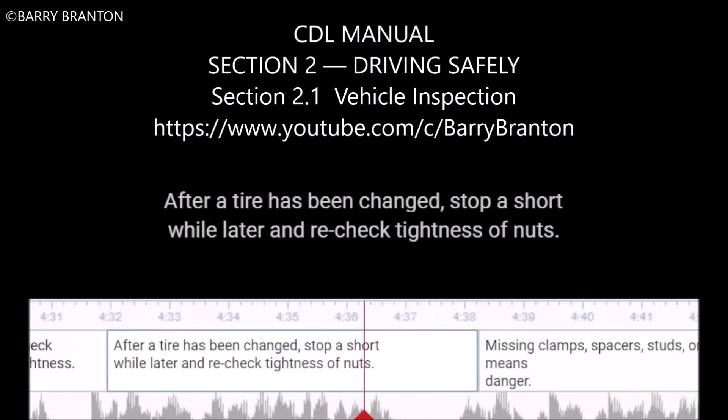Missing clamps, spacers, studs, or lugs means danger. Mismatched, bent, or cracked lock rings are dangerous. Wheels or rims that have had welding repairs are not safe. Bad brake drums or shoes. Cracked drums. Shoes or pads with oil, grease, or brake fluid on them. Shoes worn dangerously thin, missing, or broken.

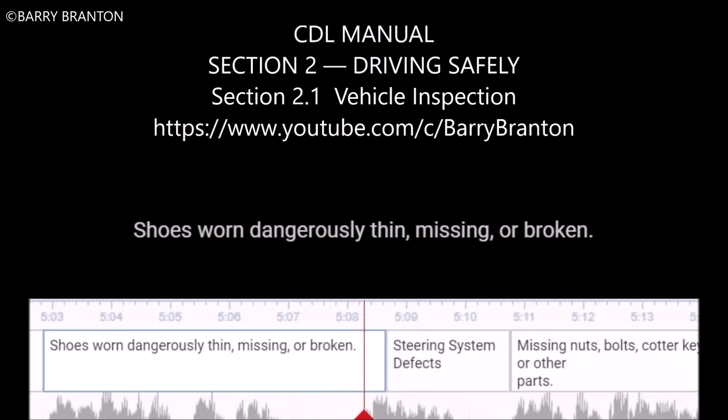Steering system defects. Missing nuts, bolts, cotter keys, or other parts. Bent, loose, or broken parts such as steering column, steering gearbox, or tie rods. If power steering equipped, check hoses, pumps, and fluid level. Check for leaks. Steering wheel play of more than 10 degrees, approximately 2 inches movement at the rim of a 20-inch steering wheel, can make it hard to steer.

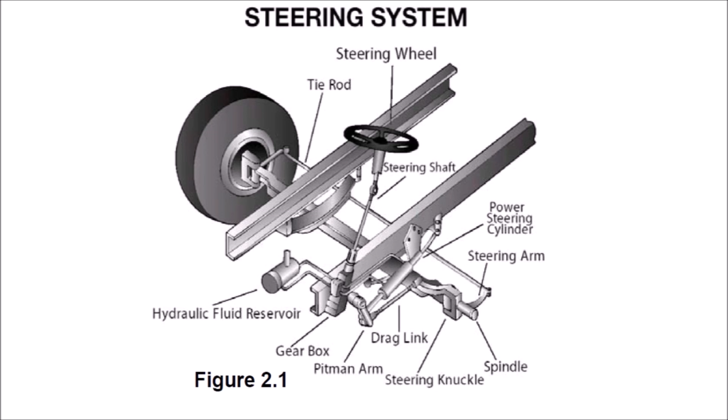Figure 2.1 illustrates a typical steering system. Picture on page 2-2, Figure 2.1, Steering System. Highlighted items: steering wheel, tie rod, steering shaft, power steering cylinder, steering arm, hydraulic fluid reservoir, gearbox, pitman arm, drag link, steering knuckle, spindle. Continuing with the text.

Suspension system defects. The suspension system holds up the vehicle and its load. It keeps the axles in place. Therefore, broken suspension parts can be extremely dangerous. Look for spring hangers that allow movement of axle from proper position. See Figure 2.2. Cracked or broken spring hangers. Missing or broken leaves in any leaf spring. If 1/4 or more are missing, it will put the vehicle out of service, but any defect could be dangerous.

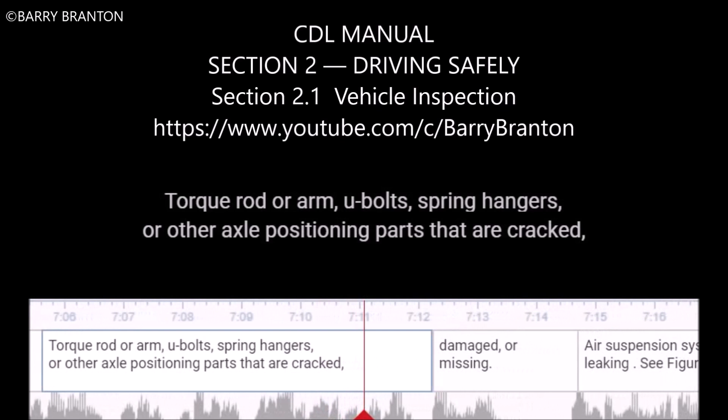See Figure 2.3. Figure 2.3 appears on page 2-3. Continuing with the text. Broken leaves in a multi-leaf spring or leaves that have shifted so they might hit a tire or other part. Leaking shock absorbers. Torque rod or arm, U-bolts, spring hangers, or other axle positioning parts that are cracked, damaged, or missing. Air suspension systems that are damaged and/or leaking. See Figure 2.4. Figure 2.4 appears on page 2-3. Continuing with the text. Loose, cracked, or missing frame members.

Picture on page 2-2, Figure 2.2, Key suspension parts. Highlighted items: hydraulic shock absorber, vehicle frame, front axle hanger, leaf spring, frame, bearing plates, torque rod, axle, main spring, auxiliary spring, spring shackle. Continuing with the text.

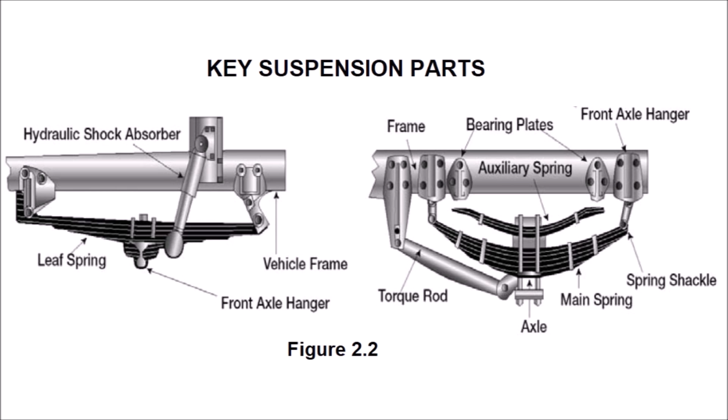Picture on page 2-3, Figure 2.3, Safety defect, broken leaf in spring. Highlighted items: broken leaf, main spring, axle.

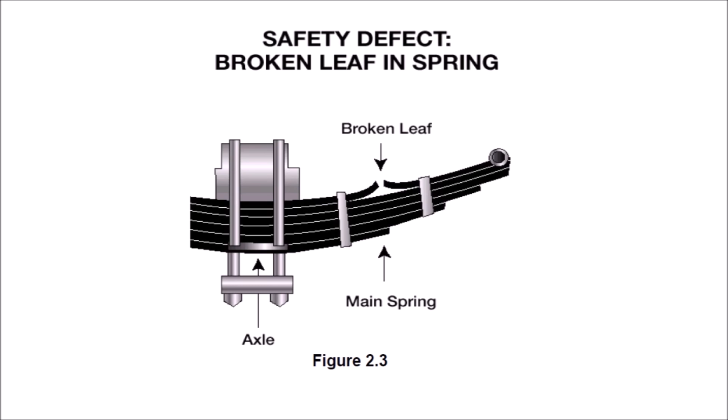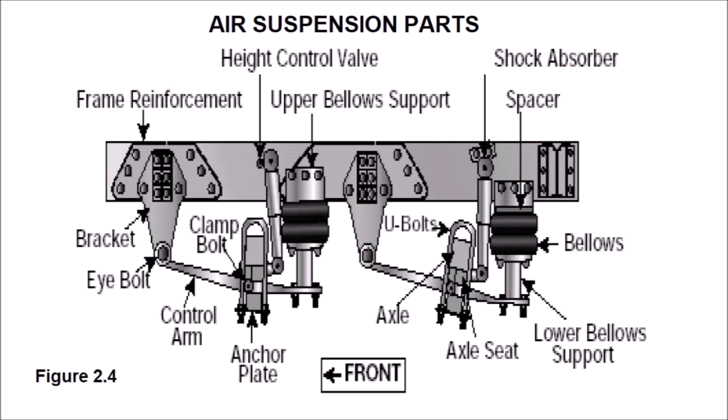Picture on page 2-3, Figure 2.4, Air suspension parts. Highlighted items: height control valve, shock absorber, frame reinforcement, upper bellows support, spacer, bracket, clamp bolt, U-bolts, bellows, eye-bolt, control arm, anchor plate, axle, axle seat, lower bellows support. Arrow points to front. Continuing with the text.

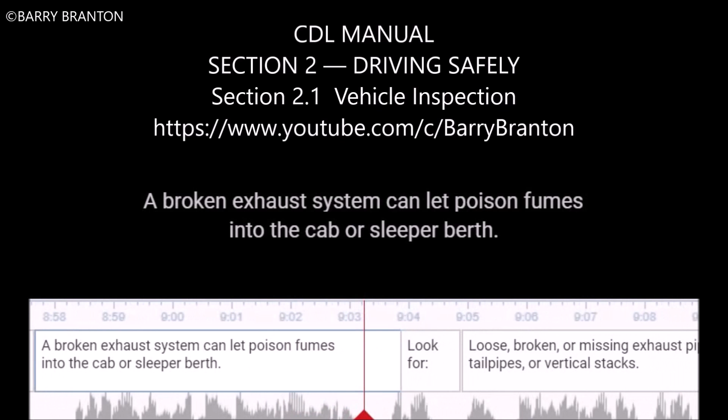Exhaust system defects. A broken exhaust system can let poison fumes into the cab or sleeper berth. Look for loose, broken, or missing exhaust pipes, mufflers, tailpipes, or vertical stacks. Loose, broken, or missing mounting brackets, clamps, bolts, or nuts. Exhaust system parts rubbing against fuel system parts, tires, or other moving parts of vehicle. Exhaust system parts that are leaking.

Emergency equipment. Vehicles must be equipped with emergency equipment. Look for fire extinguisher or extinguishers. Spare electrical fuses, unless equipped with circuit breakers. Warning devices for parked vehicles. For example, 3 reflective warning triangles. Cargo, trucks. You must make sure the truck is not overloaded and the cargo is balanced and secured before each trip. If the cargo contains hazardous materials, you must inspect for proper papers and placarding.

2.1.4 CDL Pre-Trip Vehicle Inspection Test. In order to obtain a CDL, you will be required to pass a pre-trip vehicle inspection test. You will be tested to see if you know whether your vehicle is safe to drive. You will be asked to do a pre-trip inspection of your vehicle and explain to the examiner what you would inspect and why. The following 7-step inspection method should be useful.

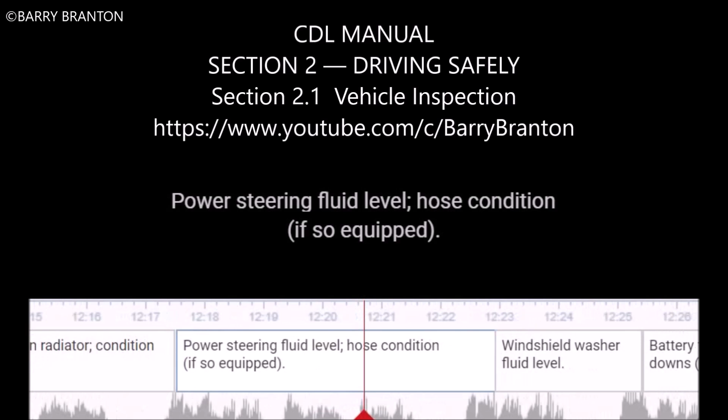Step 2. Check engine compartment. Check that the parking brakes are on and/or wheels chocked. You may have to raise the hood, tilt the cab, secure loose things so they don't fall and break something, or open the engine compartment door. Check the following: engine oil level, coolant level in radiator, condition of hoses, power steering fluid level, hose condition, if so equipped, windshield washer fluid level, battery fluid level, connections, and tie-downs. Battery may be located elsewhere.

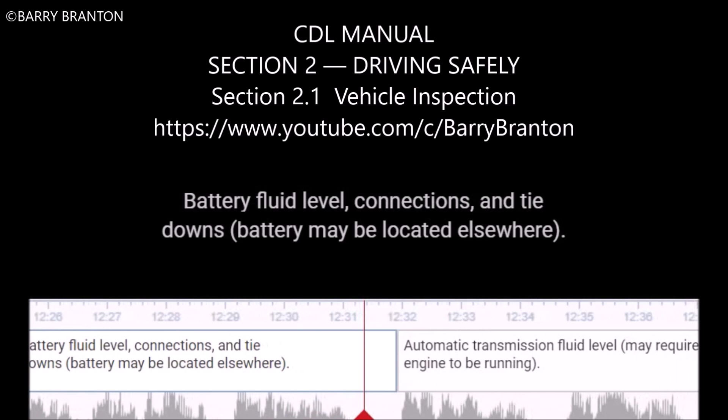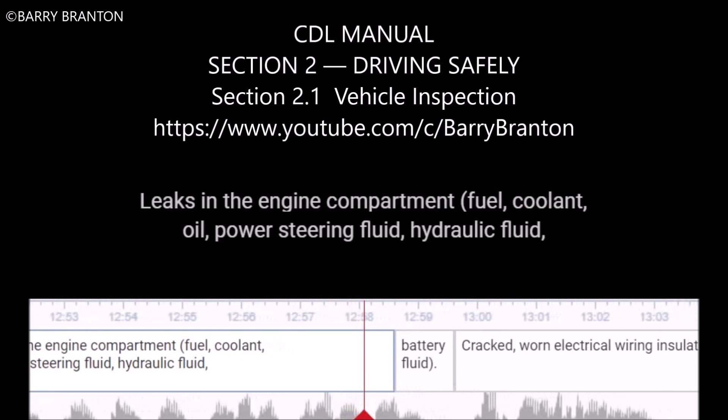Automatic transmission fluid level. May require engine to be running. Check belts for tightness and excessive wear. Alternator, water pump, air compressor. Learn how much give the belt should have when adjusted right and check each one. Leaks in the engine compartment. Fuel, coolant, oil, power steering fluid, hydraulic fluid, battery fluid. Cracked, worn electrical wiring insulation. Lower and secure hood, cab, or engine compartment door.

Step 3. Start engine and inspect inside the cab. Get in and start engine. Make sure parking brake is on. Put gear shift in neutral, or park if automatic. Start engine, listen for unusual noises. If equipped, check the anti-lock braking system, ABS, indicator lights. Light on dash should come on and then turn off. If it stays on, the ABS is not working properly. For trailers only, if the yellow light on the left rear of the trailer stays on, the ABS is not working properly. Look at the gauges.

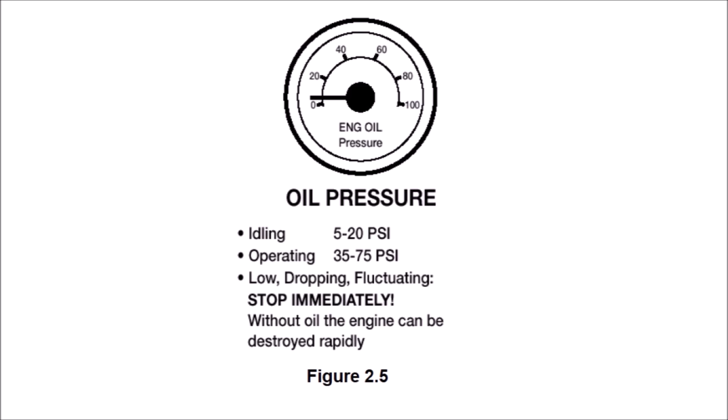Oil pressure should come up to normal within seconds after engine is started. See Figure 2.5. Picture on page 2-4, Figure 2.5, oil pressure. Idling, 5 through 20 psi. Operating, 35 through 75 psi. Low, dropping, fluctuating, stop immediately. Without oil, the engine can be destroyed rapidly. Continuing with the text.

Air pressure. Pressure should build from 50 to 90 psi within 3 minutes. Build air pressure to governor cutout, usually around 120 through 140 psi. Know your vehicle's requirements. Ammeter and/or voltmeter should be in normal range or ranges. Coolant temperature should begin gradual rise to normal operating range. Engine oil temperature should begin gradual rise to normal operating range. Warning lights and buzzers. Oil, coolant, charging circuit warning, and anti-lock brake system lights should go out right away.

Check condition of controls. Check all of the following for looseness, sticking, damage, or improper setting: steering wheel, clutch, accelerator, gas pedal, brake controls, foot brake, trailer brake if vehicle has one, parking brake, retarder controls if vehicle has them, transmission controls, interaxle differential lock if vehicle has one, horn or horns, windshield wiper and washer, lights, headlights, dimmer switch, turn signal, four-way flashers, parking, clearance, identification, marker switch or switches.

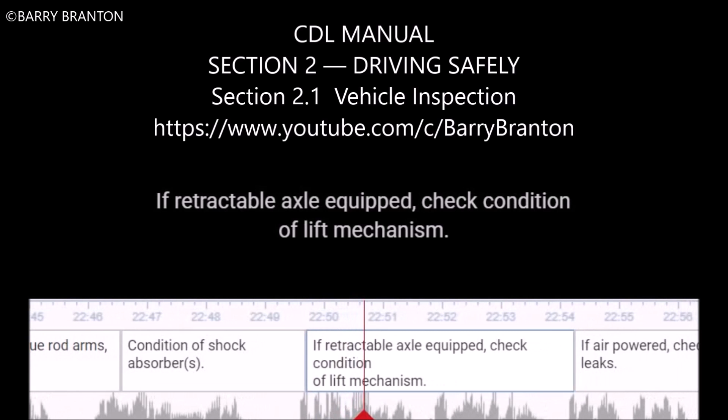Suspension. Condition of spring or springs, spring hangers, shackles, and U-bolts. Axle secure. Powered axle or axles not leaking lube, gear oil. Condition of torque rod arms, bushings. Condition of shock absorber or absorbers. If retractable axle equipped, check condition of lift mechanism. If air-powered, check for leaks. Condition of air ride components.

Brakes. Brake adjustment. Condition of brake drum or drums or discs. Condition of hoses. Look for any wear due to rubbing. Lights and reflectors. Side marker lights clean, operating, and proper color, red at rear, others amber. Side marker reflectors clean and proper color, red at rear, others amber.

Rear. Lights and reflectors. Rear clearance and identification lights clean, operating, and proper color, red at rear. Reflectors clean and proper color, red at rear. Tail lights clean, operating, and proper color, red at rear. Right rear turn signal operating and proper color, red, yellow, or amber at rear.

License plate or plates present, clean, and secured. Splash guards present, not damaged, properly fastened, not dragging on ground or rubbing tires. Cargo secure, trucks. Cargo properly blocked, braced, tied, chained, etc. Tailboards up and properly secured. End gates free of damage, properly secured in stake sockets.